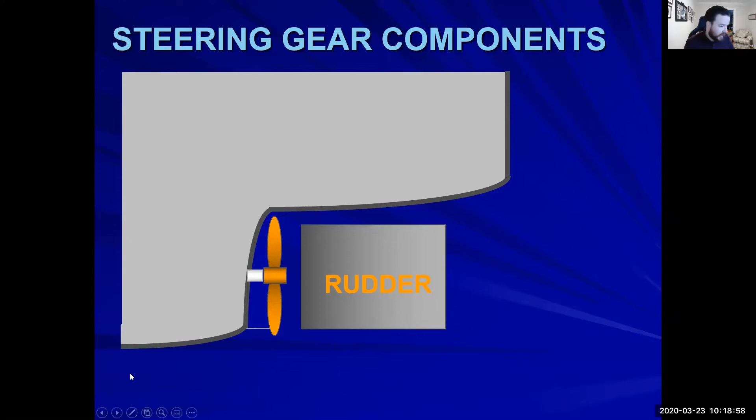Switch some windows around. It'll be better. This will be better for you guys. All right. So

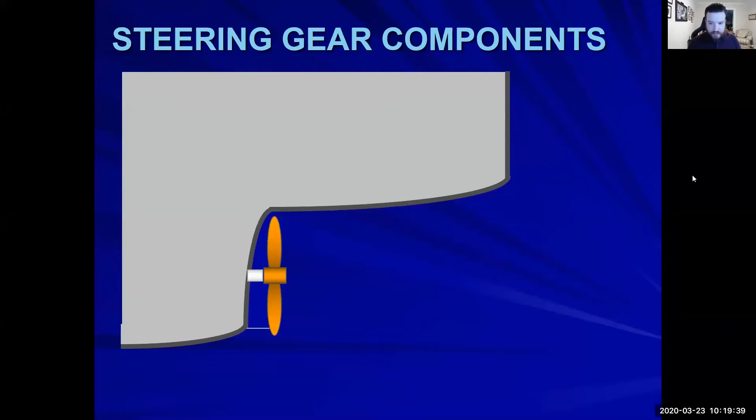Obviously we have our rudder. We have our rudder stock, tiller, steering gear, pumps, 6-way valve, and rams. So we know that the difference between the rams and our 6-way valve is the 6-way valve is controlling which steering gear pump is online. All right, that's all it does. It's not actually controlling which way the rudder turns. It's not controlling which ram is getting the feed of the hydraulics from the steering gear. It's controlling which steering gear pump is online.

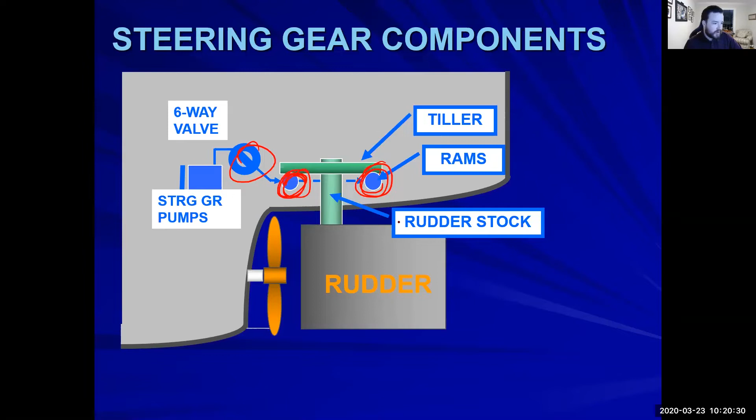The rams themselves control which way the rudder is going to be turning. Okay. Now, when we go and we're moving the rudder, we have what's called a Rapson slide. The Rapson slide is what's going to be controlling, and it's the tilting motion that's going to be either moving these rudders one way or the other.

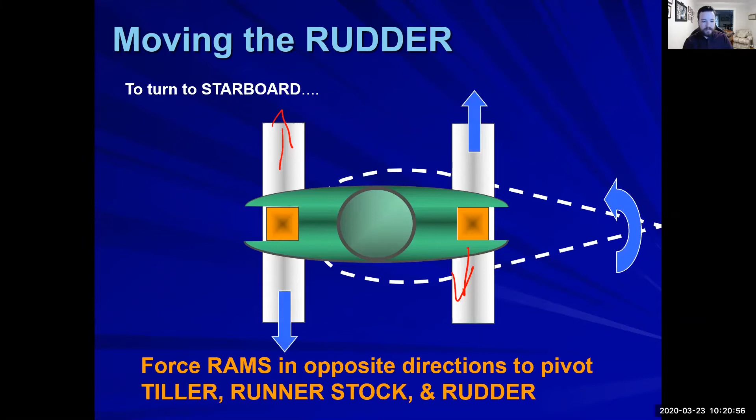Let's see if I can. Oh, there's the chat. Okay, good.

So these are the Rapson slide. All right. It is not the ram that's going to be controlling the tilt plate. This is the Rapson slide. It's going to be controlling which way the rudder is going to be moving, utilizing the rams. All right.

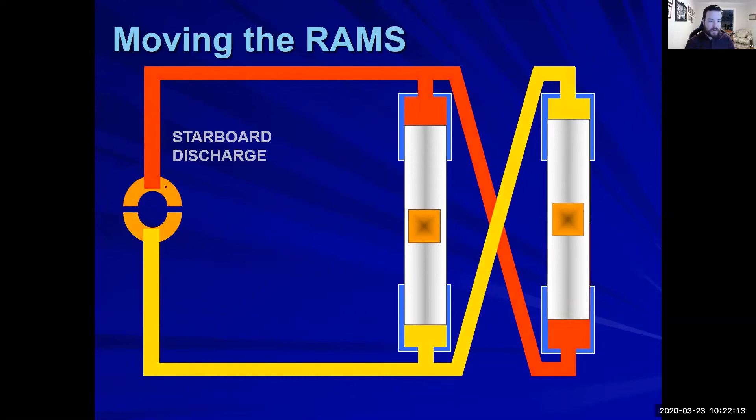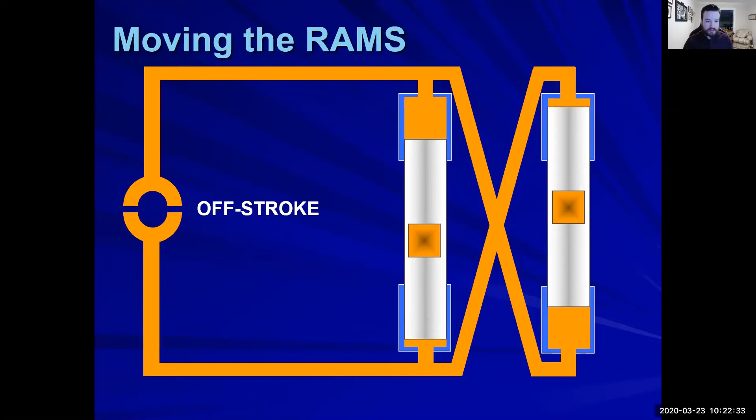So just to move the rams, we're going to be utilizing basically our hydraulic pumps. All right. So they're going to be crossing over, and they're either going to suck from one side and pump to the other, and then they're hydraulically locked. The rams are going to be locked hydraulically because the tilt plate is going to be flat. So it's going to be spinning, but still having zero pumping moving through it. Same thing on a port discharge. It's going to go the opposite direction, and then the rams lock in the new position.

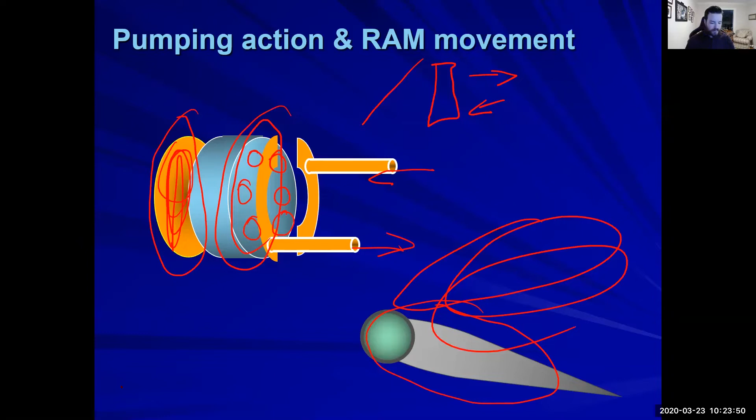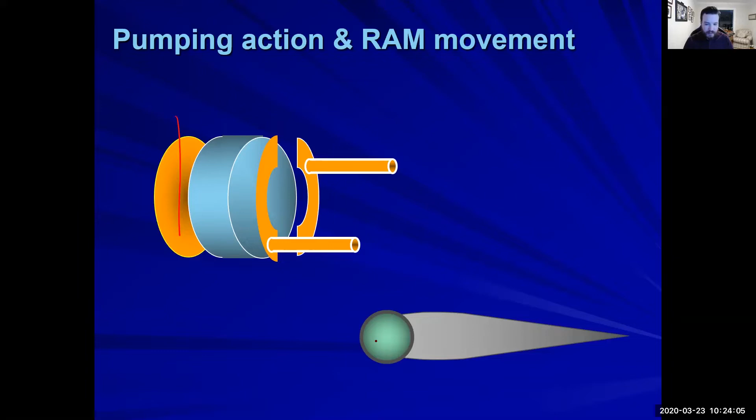As soon as you have an angle on your tilt plate, you're going to have movement going in or out one way or the other. All right. Just like that. And now you're in the position you want to be in, and your tilt plate goes back to the zero position, and you have no movement on your rudder down here. This is staying stagnant.

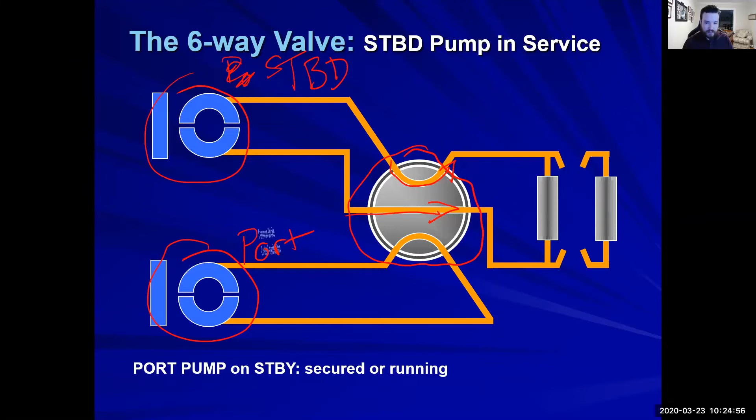But we're having no movement because of our common stroke, where basically our tilt plates are in a neutral position. But as soon as we have any sort of tilt, and just like we said last class, these are both controlled by the yoke and the differential, which is therefore controlled by the ram. Both of them are going to be moving together, even though hydraulic oil is only being sent from one side. So the starboard pump is the only one sending hydraulic oil to our rams.

And we go in the opposite direction, and now we have flow going the opposite way, even though our steering gear pump is still spinning in only one direction. All right, now we go back to our neutral.

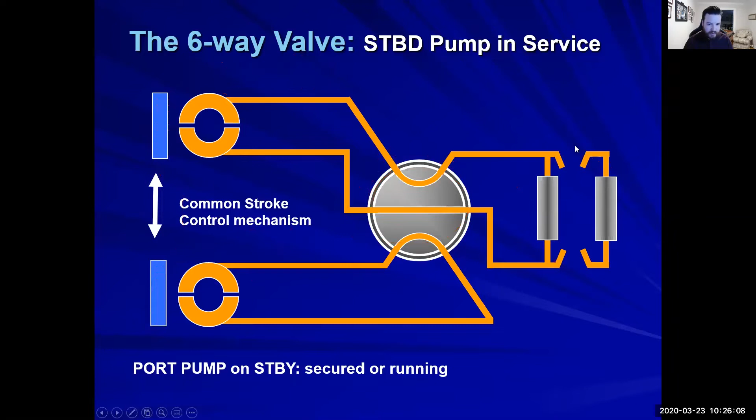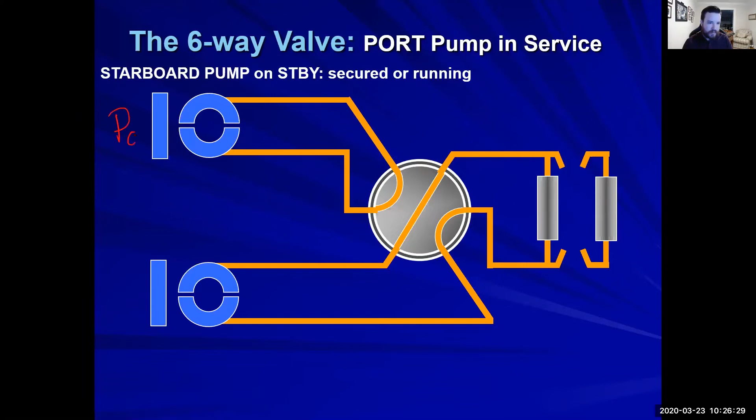And now we're going to have our 6-way valve spin. All right, and this allows us, again, to control which steering gear pump is online and which one is not. So we have our port pump, and we have our starboard. Our starboard pump is online right now.

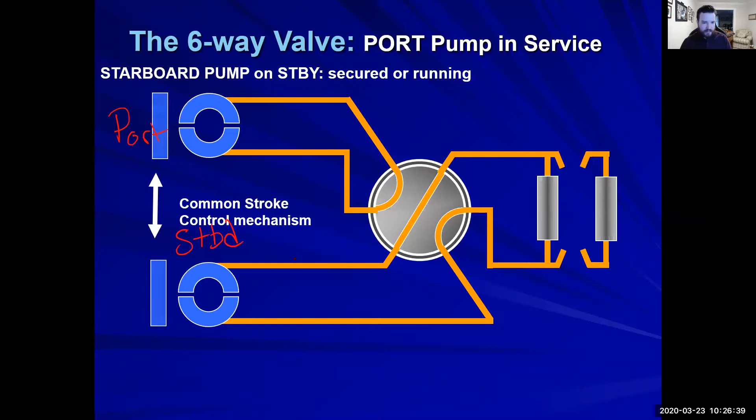Same thing again. If the tilt plate is moving one direction or the other, you're going to have flow going from only the starboard pump to our rams, whereas our port pump is just basically circulating. Again, this is how the rams are going to be going in different directions.

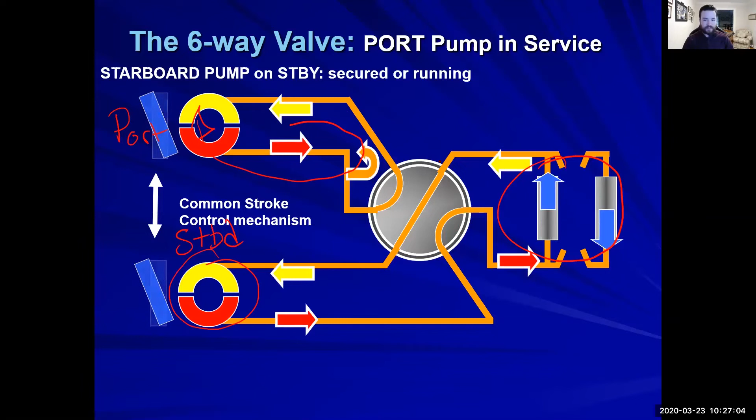So it has 3 positions, okay? Always 3. One is for the starboard pump online, the port pump is on standby. Like we talked about in class, the port pump could be running, it could be not running in any one of those conditions. All we know right now is that it's on standby. It allows it to run, but we don't need it to be running.

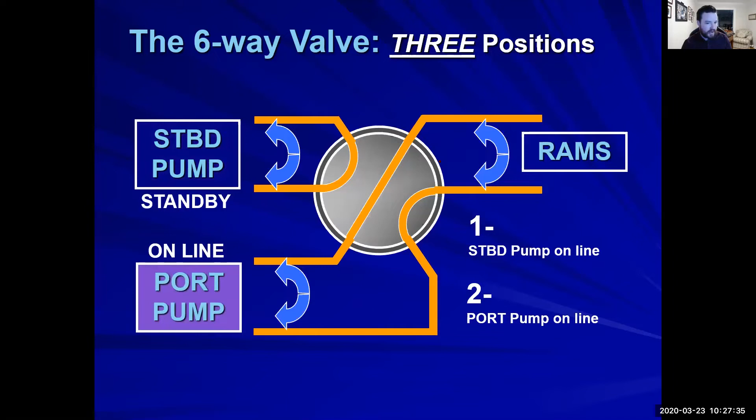All right. Position number 2 is the port pump is running, the starboard pump is on standby. And position 3 is a locked rudder position. All right. Like we talked about, this might be when we are in dry dock and we're trying to remove a portion of the shaft or anything like that. We want to make sure the rudder is going to be locked hydraulically.

Or we can be in a position where we're going to be dead sticking down the Hudson and we're going to be getting towed to the scrapyard because our ship is old and we don't want to have any ability for the ship to start steering itself.

All right. So why is it a 6-way valve if there's only 3 positions? It's because basically you have your 6 pieces coming off of it. So it's going 6 different directions of flow. That's why. Not based on the 3 ways that it could be in a position. It's where all the hydraulic oil is going to be going.

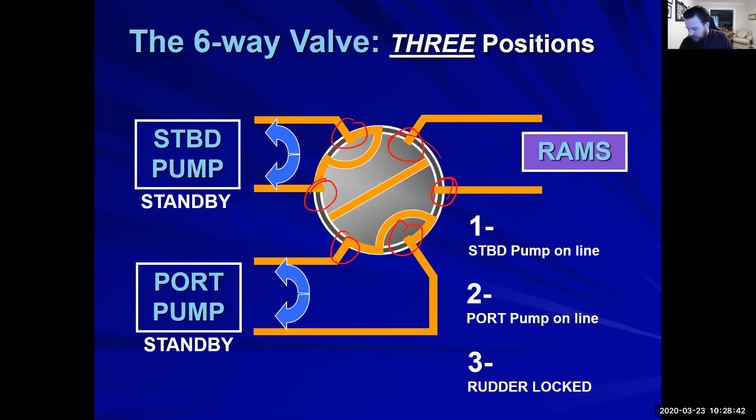All right. So negative feedback loop. All right. This, as far as what we're concerned with here, is just like we talked about. If you need to have 10 apples for some recipe that you're going to be cooking that day, when you're in the store, you basically are going to be grabbing one at a time. And every single time you get one, your mind is going to be computing, okay, I grabbed 1, now I need 9. I grabbed another one, I need 8.

That's the mentality. You're not just sitting there when you're grabbing apples going, I need 10, I need 10, I need 10, I need 10. And all of a sudden you have 20 apples in your cart. Every single time you grab one, you know you need 1 less than you did before. And that is what's going to be going in. Your feedback is how much you have. And this is what you want.

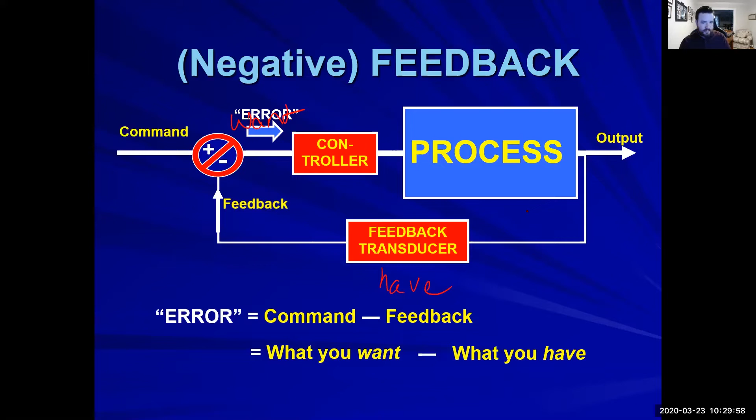All right, let's talk about the differential. Is everybody understanding? If you don't understand the negative feedback loop, let's talk about it before we get into the differential. Yeah, go back, please. You need to go back? Yeah, can we go back to the loop? Yes.

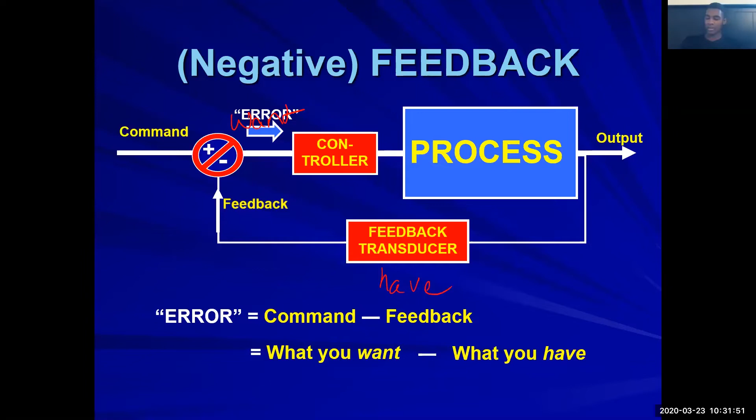All right. So with the differential, we have our input gear. All right. We have input gear number 1. This input is coming from the rack. All right. And the rack is coming from the helm. Then input gear number 2. This is coming from the rudder itself.

You're muted. Yeah, you're muted. All right, thank you. I must have hit the mute button by accident.

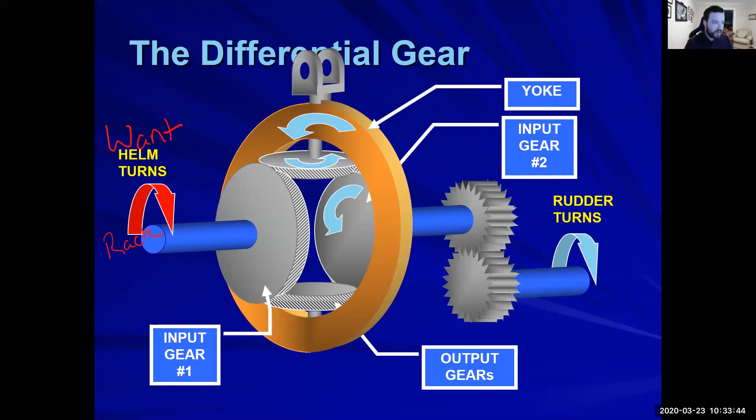So as this rack turns, you're going to be having an input gear number 1, which is what you want. That is your 10 apples that are going in. What you have is coming from the rudder. All right. This is your want, and this is your have. And this is your output.

This piece right here of your yoke. This is what is in your cart. All right. This is how many apples you have at that moment that you're still trying to get.

All right. So as the input gear turns, as these gears are turning, both this output gear and this output gear, they are connected and they're pushed into their gears. Where this hand is the output gear, this hand is going to be the input gear. And as it spins, it's forcing my other hand to do only one thing, which is to push, and it's going to turn it towards me. All right. That's what's going to be happening with it. And in turn, this yoke is going to be moving one way or the other.

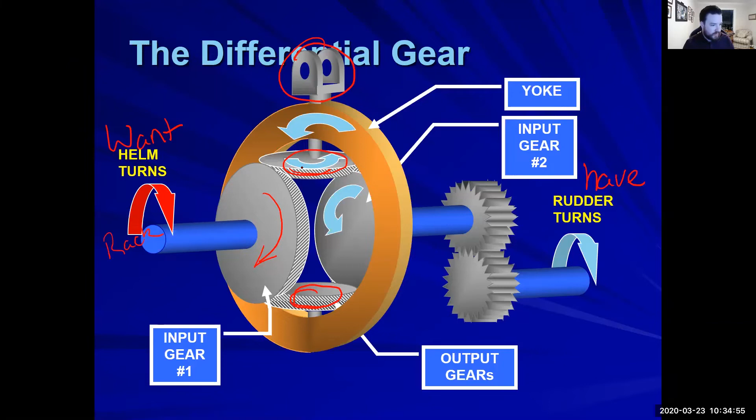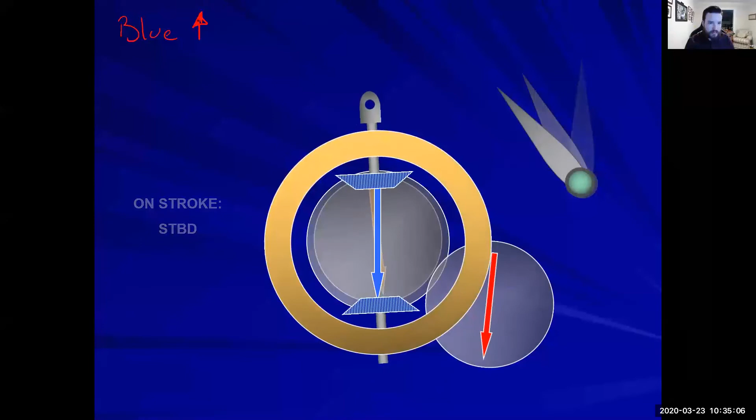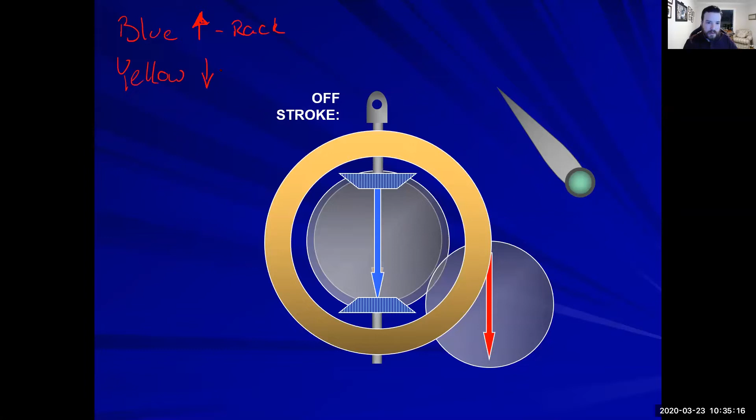So our blue line, our blue arrow, that's coming from our rack. Our yellow, that is going to be the input coming in from this red arrow. All right. This gear here and this gear is coming from the rudder. All right.

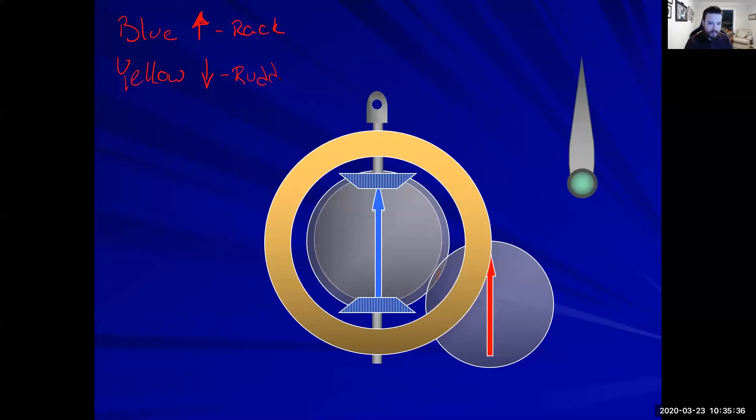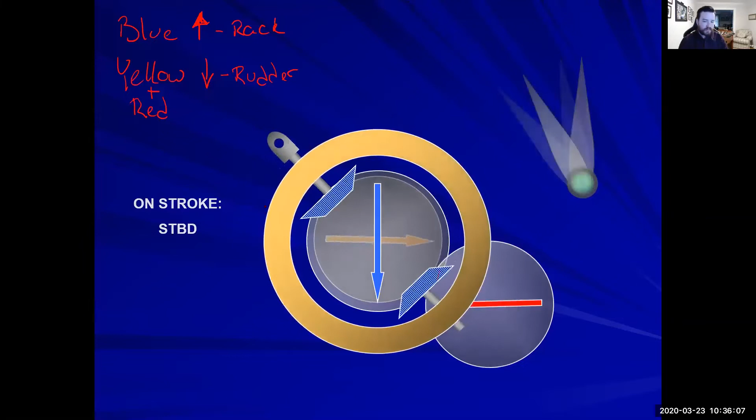So as our input is going in, it's the blue arrow. It's inputting a signal. That signal is saying, hey, tilt plate, I need movement in one way or the other. So as this yoke spins, this is physically moving the tilt plate right now. And as soon as the tilt plate starts to move, even just an inch, it may not be fully moved yet, but it starts to move.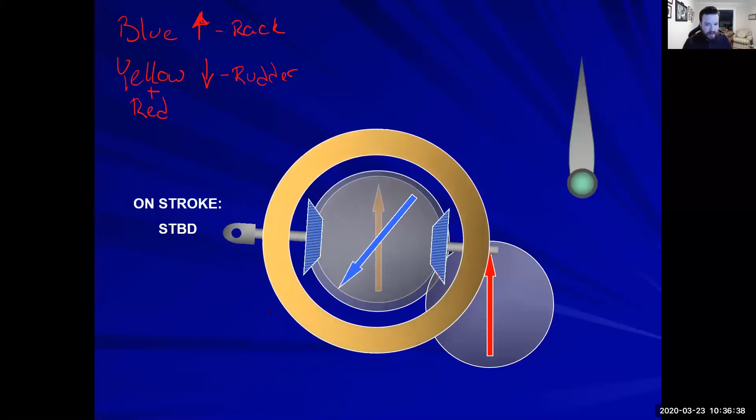You start to send hydraulic fluid through. All right. So you don't even have to get that yoke all the way tilted over. You will start to have hydraulic fluid moving through it and being pumped. All right. So we are pumping, pumping, pumping. And now since we started pumping, we are getting movement back. Our actual rudder is moving. And since the rudder is moving, we are now coming to our position that we want to be at.

And now that we're at the position that we want to be at, we no longer need hydraulic fluid moving, and we don't want to have to hold our actual helm in. If we want to go 10 degrees right rudder, we don't want to have to hold it at 10 degrees or go back to center the entire time.

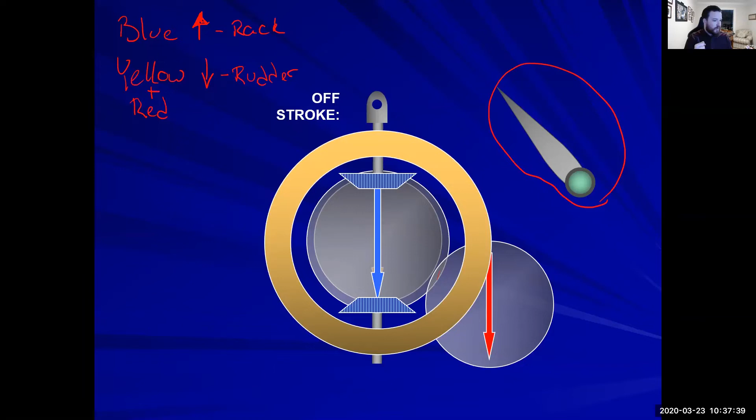Just like we were saying in class, if you had to make a right turn in your vehicle, you don't turn your wheel all the way over and then, okay, now it's set, now in order to hold it at that position, I have to go back to 0 position with my steering wheel. All right. It's the same thing on a helm on a ship. You've got to hold 10-degree right rudder. You don't want to be holding it. And when you're holding it, you don't have to go back to 0 to hold that position.

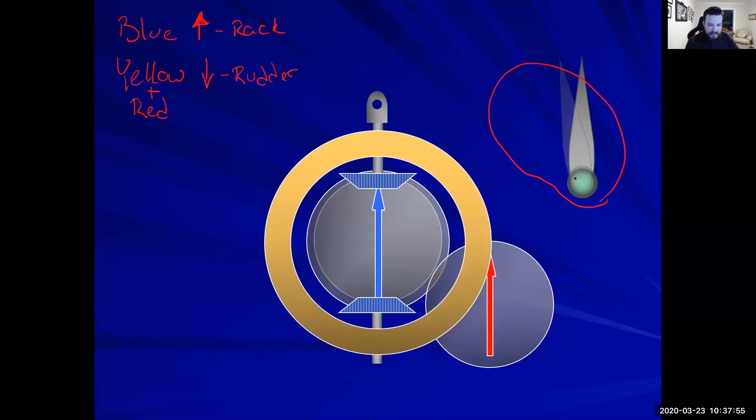So now we're getting an on stroke to port. So we are having flow going through. The rudder comes back to center. And we're good. All right. Keep in mind, every single time this comes back and the rudder comes either back to center or the tilt plate is in the neutral position, we're having no flow with the tilt plate, and when the rudder comes back to 0, it's in reference to the rudder being on the 0 position.

All right. So if the rudder is on the center line, that center line on the ship will be 0. All right. And then every line off of it, we have either 10 degrees going off, then we have 20 degrees, 30 degrees, and so on and so forth. Oops. All right. And when we talk about the actual tilt plate, this is going to be the neutral position.

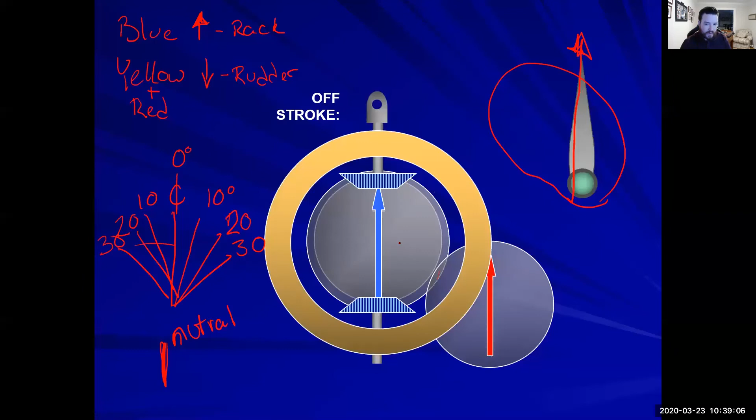So with the differential gears, anybody still confused in how it's working? Everybody kind of brought up to speed on it, a better understanding than last week or 2 weeks ago as far as what we were remembering?

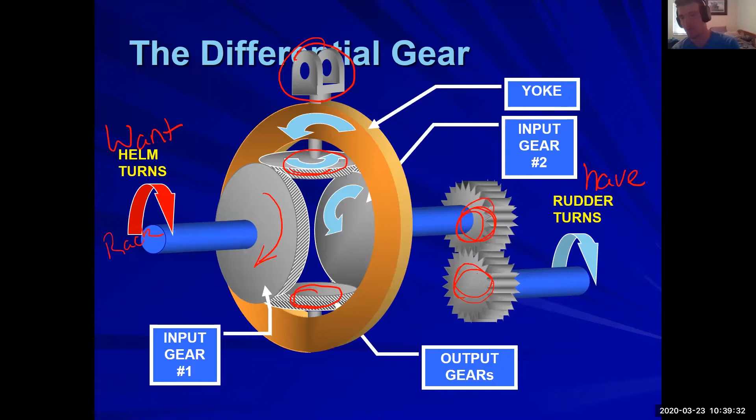Wait, so is that first turn, it's angling the tilt plate is what you're saying? So the blue arrow, whatever the blue arrow. Yes. Yeah. So this is coming in from the rack position. Okay. All right. And the yoke itself, this piece right here, this is what everyone talks about as far as the spider legs. You actually have like a piece of bolt coming off of here and it goes off and it goes to a tilt plate. Oh, okay. All right. So that's moving that.

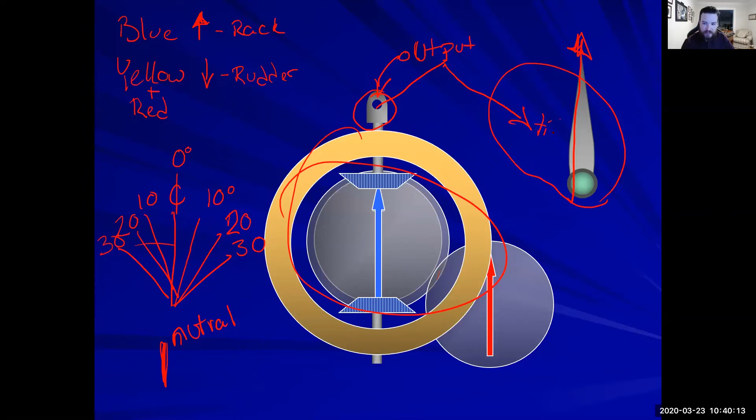This is giving input. This is the output. This is the output of this system here, but it's the input to the tilt plate. So right. This is what's sending a signal out to the tilt plate. Okay. All right. Yep. Anybody else? Okay, cool.

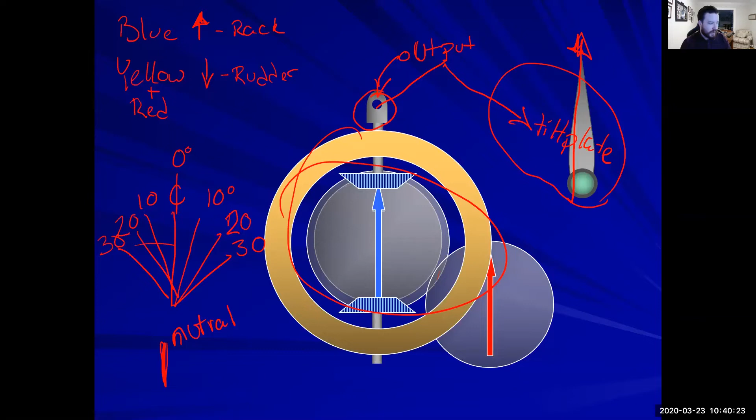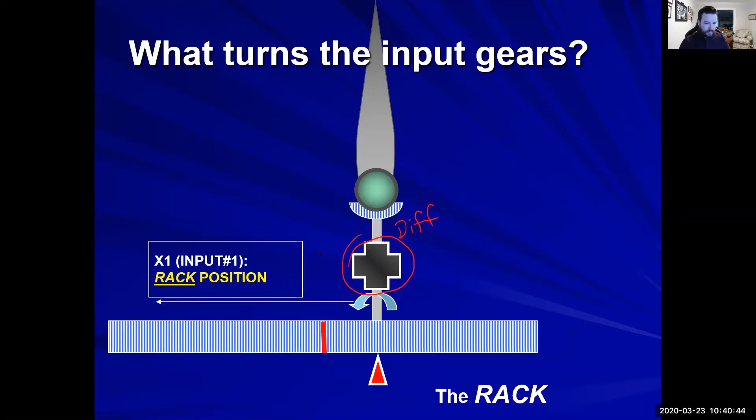So what turns the input gears? So we have the rack. Now right here, that's going to represent our differential. Now, this right here and this rack is basically like a gear on its side. Like you take a gear and you're going to split it open. So all along this whole rack is going to look just like a whole bunch of teeth.

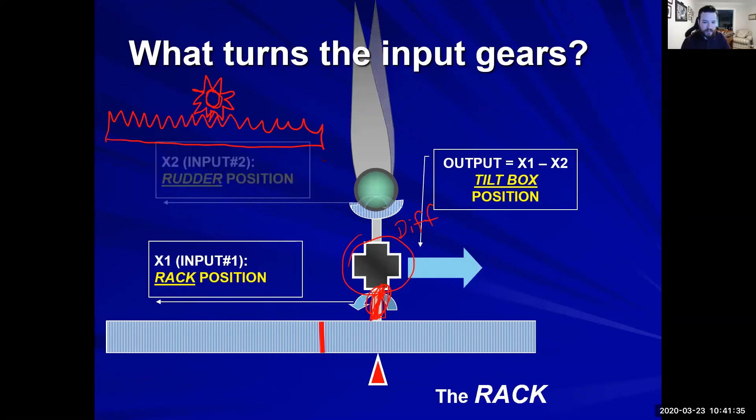So that is your input. Input number one, that's coming from the helm. That's coming from the rack. Input number two, that's coming in from the rudder position. All right, what you have at that moment. And the output is going to the tilt plate or the tilt box.

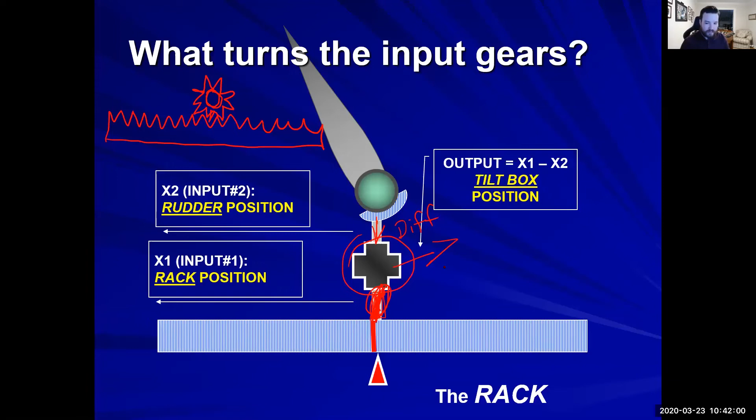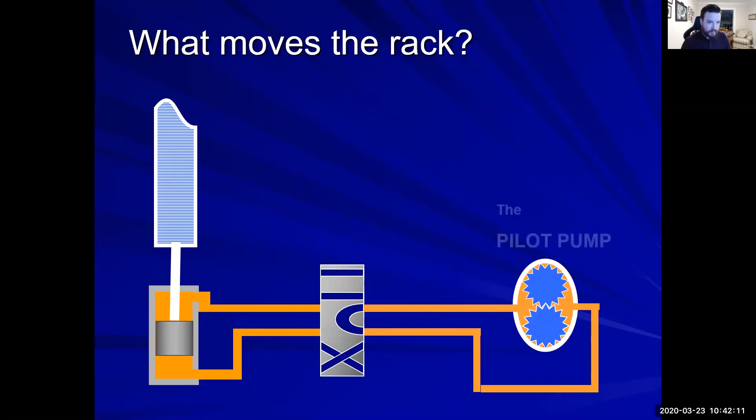So what moves the rack? You have the pilot pump. All right. Now, just like our steering gear pumps themselves, this is always going to be spinning. This is always going to be pumping. All right. But this shuttle valve right here has three positions. One of them is just going to keep looping fluid back around. The others are going to give the other two variants that you have, either crossing flow or going in the direct flow pattern.

So right now we're having flow and it's just going through the pilot pump and that's all where it's going. All right. Now, as soon as we go to this position, now we're having flow that's going in to the top part of the rack. All right. Whereas this is a piston and the entire time you would have a signal that comes in from the helm and it's going to push either one side or the other of the shuttle valve and you're going to have flow that goes through it. And at the same time, it's going to be sucking it out from the bottom.

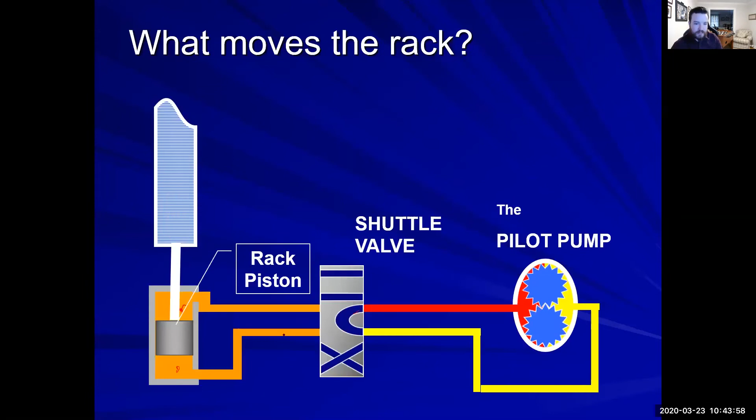What would you say is gonna push the shuttle valve? We're going to get into the next slide, but it's going to be basically some sort of electrical signal coming from the helm. All right, the helm is going to be directly controlling the shuttle valve. So as we go in the other position, you can see we have flow that's going to be going across here. And it pushes on this side of the piston and sucks from this side. All right. So that's how we have control over our rack.

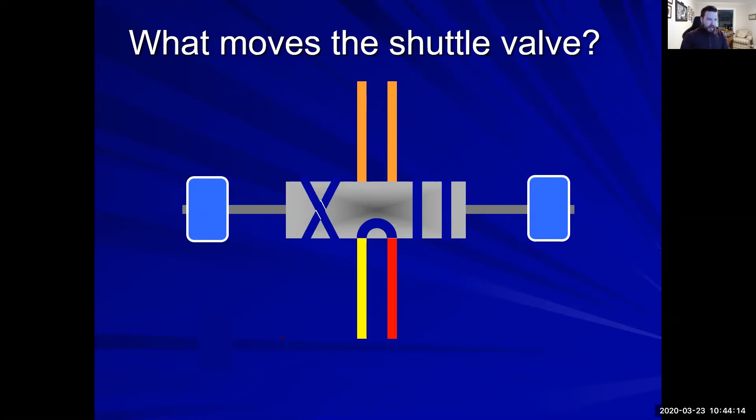So now we have the shuttle valve. We have solenoids. So just like we talked about in class, with solenoids it's basically coiled wire with electricity. All right. And basically what you're doing is when they're energized, they're either going to be pulling in the solenoid valve or it's going to be pushing out the solenoid valve.

All right. So right here, what we have is a solenoid that's energized and it's pulled in the magnet here, which means that this is going to be a normally closed solenoid valve. All right. So when it's de-energized, it's going to fail closed. All right. On either side of here. That's when you're going to hear reference to normally open or normally closed. All right. Normally open would mean that as soon as it's de-energized, it's going to fail open. All right. And it depends on which systems that's going to be the safer side.

All right. So just like when we talked about with water making, we would want something to fail open when it's going to fail to the bilge, all right? Because we wouldn't want to throw salt water into our distillate tanks. But you would want something to fail closed is the valve that's going to our distillate tanks. So if you lose electricity to the ship and you have flow coming out of your distillate tank, you're going to have no flow going to your distillate.

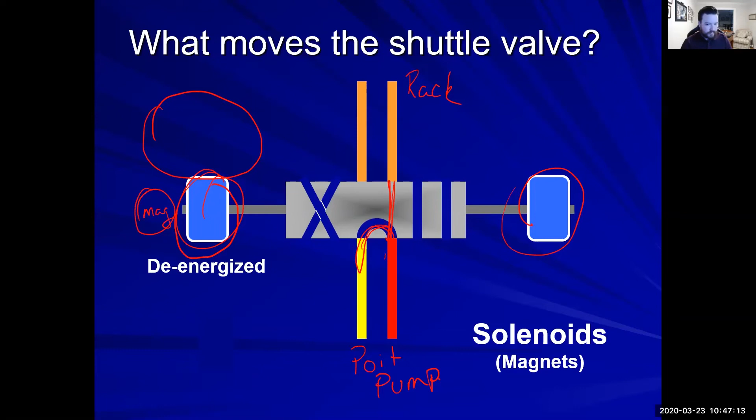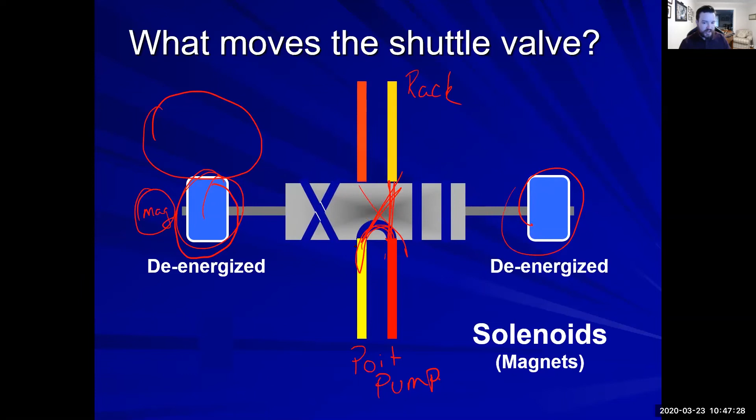So when this solenoid energizes, it's going to pull in, and now we have a cross-flow position. And it de-energizes, and you're just having flow going through the pilot pump.

Any questions so far? All right.

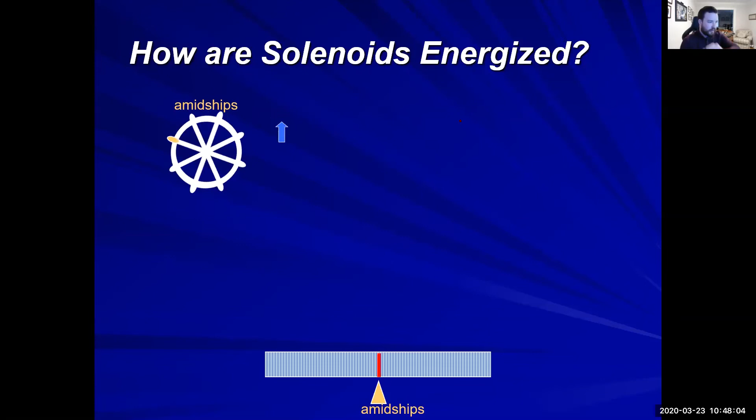So when you have your helm, you either have positive voltage or negative voltage, depending on which way it's turning. So when you turn to port, you're going to get a positive voltage. The more you turn to port, the larger the voltage. So when you go to starboard, you now have a negative voltage, and the same thing again - the more you turn, the more negative the voltage.

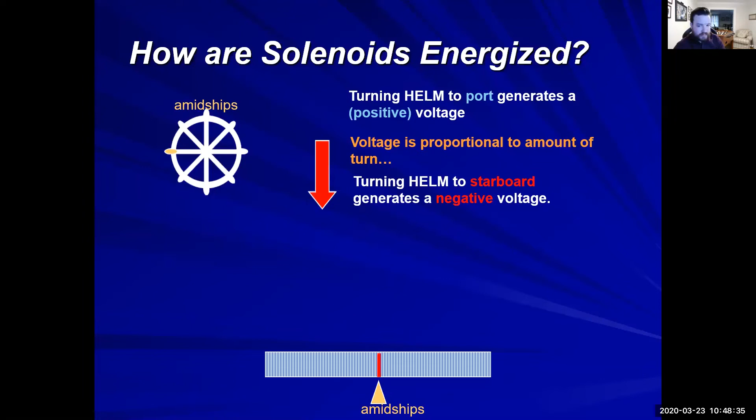So moving the rack to port generates a positive voltage. The larger the voltage, the more rack movement you're going to have one way or the other.

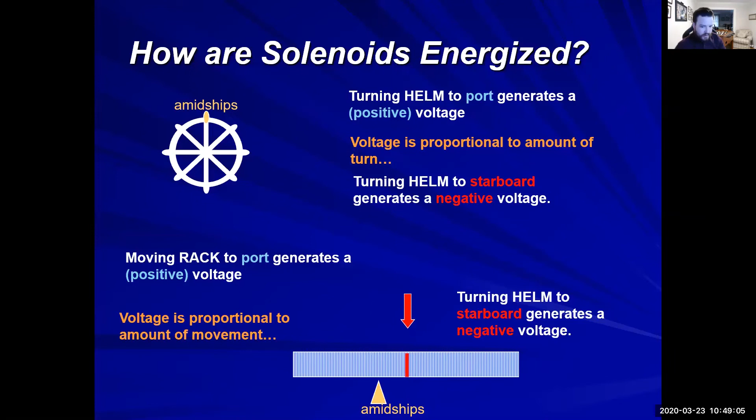Again, we'll re-hit this when we hit electricity. This piece is not important until we go into electricity.

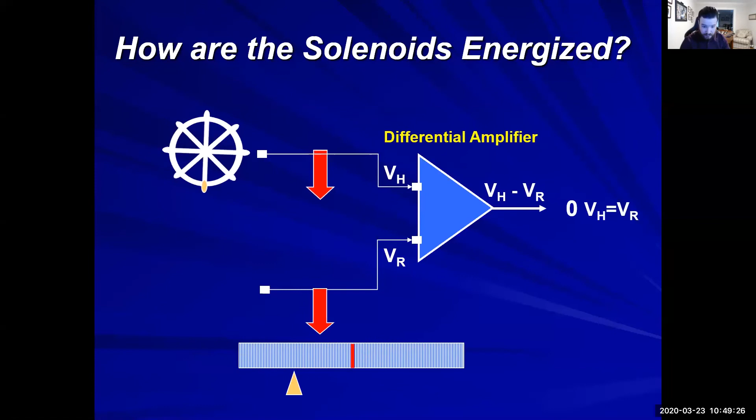So basically what we have is the helm position and the rack position - helm to port of the rack. As soon as your helm position is different from the rack position, with the helm more towards the port side of the rack, you're going to have a pull that allows it to pull the rack more towards the port side, to get a stronger pull.

And then the same thing for the opposite direction. If the helm is farther starboard relative to the rack, you're going to have a greater negative pull, so the rack is going to increase even more towards one direction.

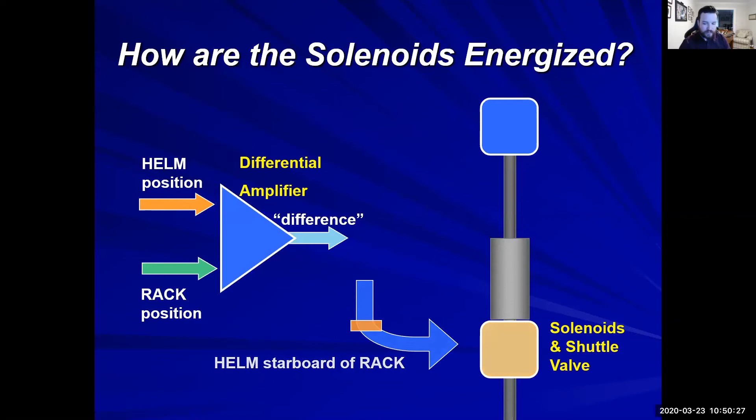So as we go through the steering sequence: the steering gear pump, both of them are running off stroke, so the tilt plate is in a neutral position. The pilot pump is recirculating, so it's constantly flowing.

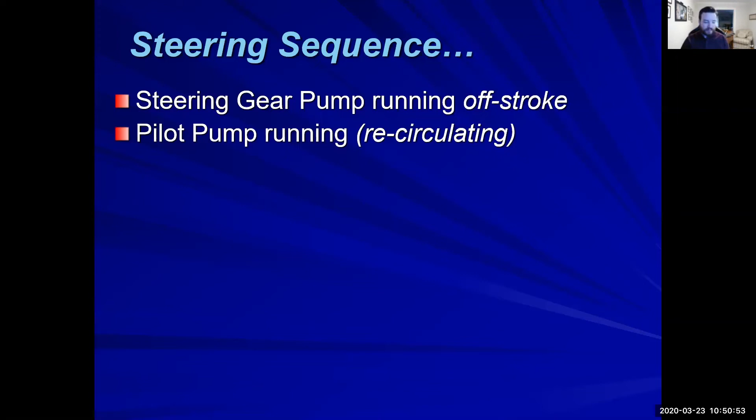The helm rotates for right rudder - so this is just the helm moving. The starboard solenoid energizes, and the shuttle valve directs pilot pump discharge to the rack piston.

So now we are starting to actually have movement. The solenoid is energized. We now have flow coming out of the pilot pump and going into the rack piston that's going to move the rack. So the rack moves to starboard.

So turning differential gear number 1 - remember, this is the input coming off of the rack itself. So the rack movement has matched the helm movement, because how much you turn that helm one way or the other is going to determine how much that rack actually moves.

That's the big thing - it de-energizes. The rack movement matches the helm position. So once it matches, it de-energizes the solenoid, returning the shuttle valve to the neutral position.

So the rack still - if that arrow right there is the neutral position.

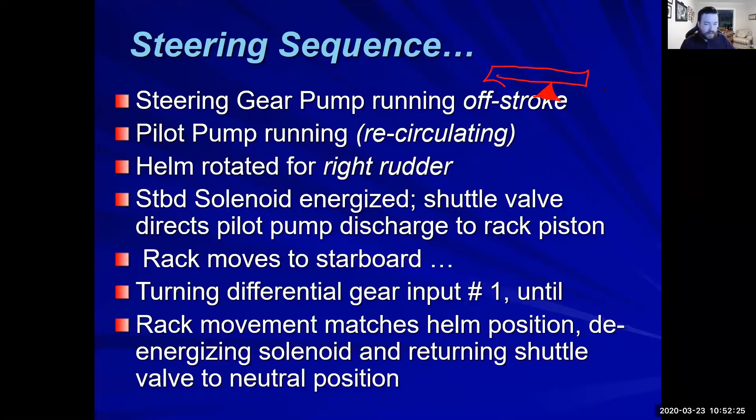Just like the rudder, just because we have met what we want to get to doesn't mean that we have to bring the rack back over to neutral. Just because we've reached the point we want doesn't mean we come back to our neutral position. Just like when you're steering a car - making your right turn doesn't mean you have to bring your steering wheel back to neutral in order to hold that right turn.

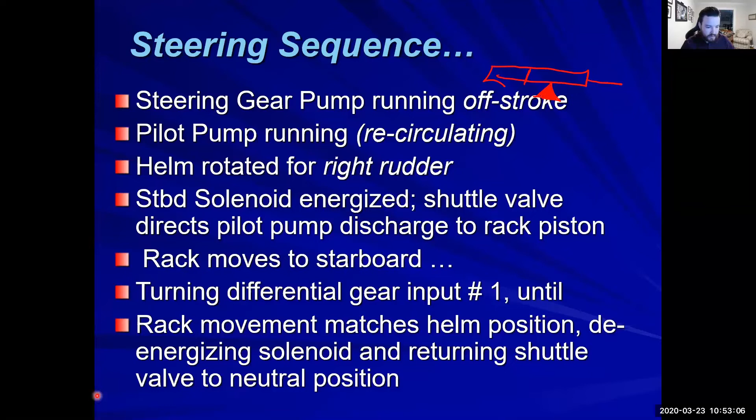All right, so this is all of it going in one full sequence. Again, number 1 matches with number 1 right here, even though they're not numbered. So the steering gear pump is online, pilot pump online, both actually having flow. All right, the helm moves to starboard.

Our shuttle valve gets sucked into its solenoid because the larger increased voltage we have here is going to have an actual effect on our solenoid.

So now we have flow coming out of this side and going into this direction. Our rack moves, so our rack has moved to match the position of the helm. Now that it's matched the actual helm position, our shuttle valve has no differential and comes to a neutral position. Notice that even though it's in neutral position, we have not moved our rack position. Last but not least, the rack has given an input to the differential.

Any questions on the sequence so far before we move forward? This is the other half of the sequence we're going to get into in a second.

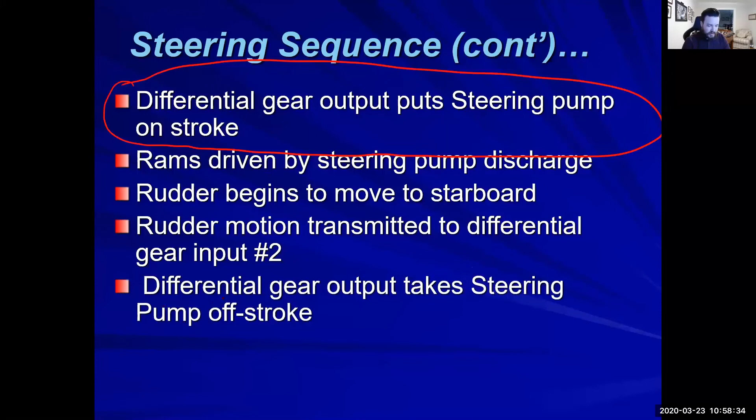The rams are driven by steering pump discharge. The rudder begins to move to starboard. The rudder motion is transmitted to the differential gear, input number 2. The differential gear output takes the steering pump off stroke. The rudder motion stops, and the next helm movement will restart the sequence.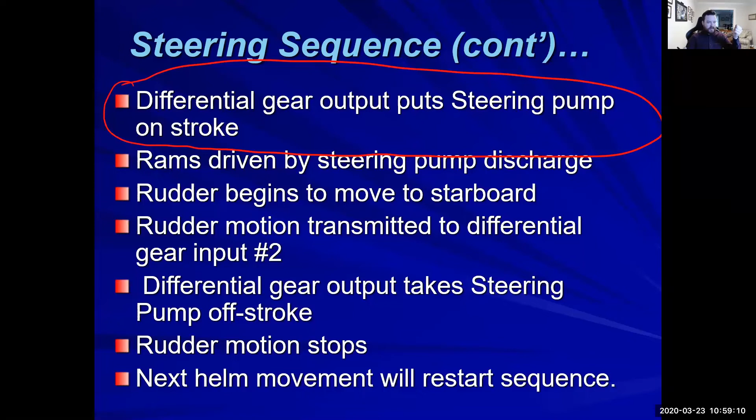And in the middle of this sequence, you can restart it basically. If 10 degrees isn't enough, just like we talked about, you can go to 15, and this will just continue the sequence even more. But just keep in mind that when you move to 5 and then to 10, as soon as you start having rudder movement, this is going to be happening continuously.

So remember what spot we were up at the last time with the drawing. We've only given input to the differential. The differential has moved the yoke. The yoke is moving our tilt plate right here. This is our tilt plate. Our tilt plate moves, and now we have flow.

Now as the rams move, the Rapson slide has actually repositioned, and has repositioned our rudder has officially moved to the position we want it to be in.

Keep in mind, in this entire sequence, this helm is still at 10 degrees right rudder. No one has moved it back to neutral, no one has done anything else with it. So we are officially at 10 degrees. The 10-degree input is saying, hey differential, I'm at 10 degrees. You don't have to be moving me anymore. I don't want to move anymore.

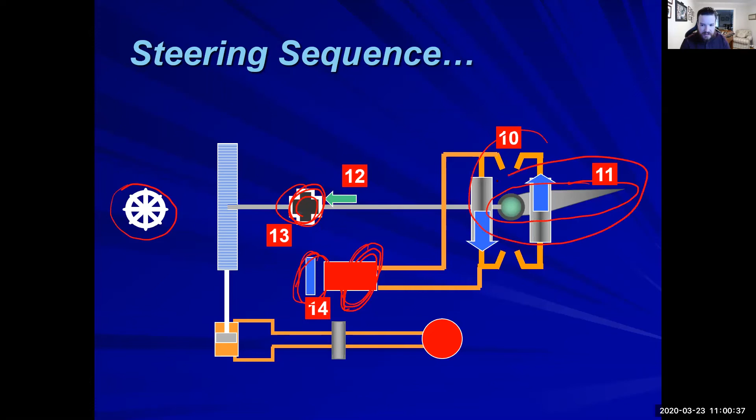The yoke comes back to the neutral position, and it causes the tilt plate to come back to neutral position. And now we are still having this pump right here. It's still spinning, but it's not outputting any hydraulic oil. So this rudder here is locked hydraulically. These rams will not move.

And again, if we want to do anything else, it just will restart the entire sequence.

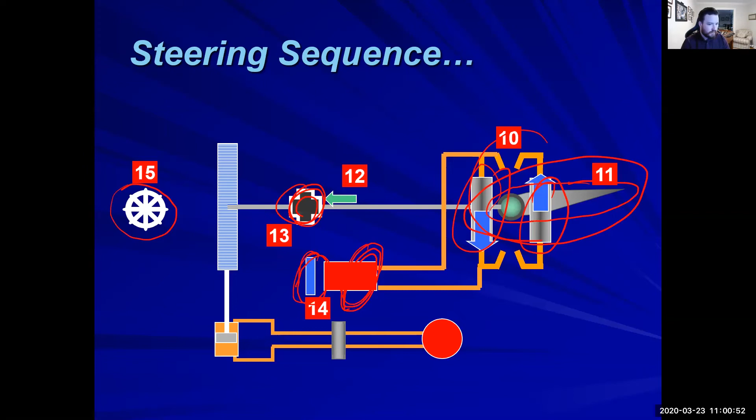So, any questions on steering gear? Anything that we've gone over? The shuttle valves are closed normally, right?

The shuttle valve has 3 positions. Or no, sorry, the solenoids rather. So those solenoids, it's all in reference to what is happening when there's no electricity going through it. So they are in the normally closed position.

Nice, so when no electricity is going through, which way is the magnet? Is the magnet going to be drawn in, or is the magnet going to be pushed away?

Any other questions? It's a nice little review for everybody. Everyone feel better about as far as what we're doing? Yeah, that was a lot better. You understand it a lot better. Good.

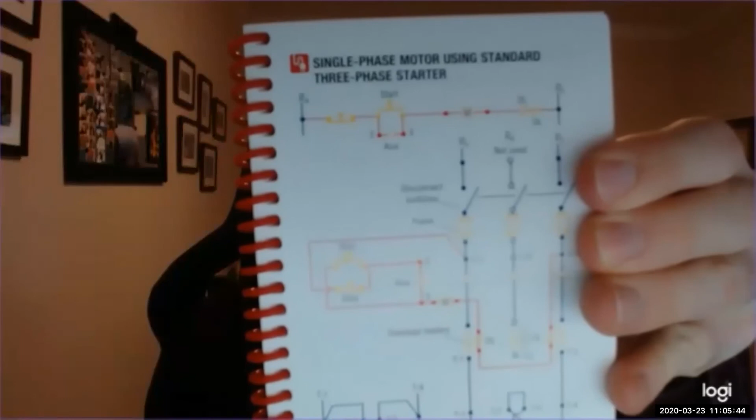Where is it? Okay, so here's the good thing. Like most electrical books that we have in the industry, this is actually geared towards operators, which is what we're trying to be. So here's a basic motor controller circuit. We're going to get into the breakdown on that, but to find information on this in any good book is hard to.

So I would highly recommend getting these. Like I said, it was $12 off Amazon, and almost every single ship you go onto, someone will have some sort of a copy of these out there because they're that good. They're also quite small. I mean, this is my head compared to it. It's not a big textbook.

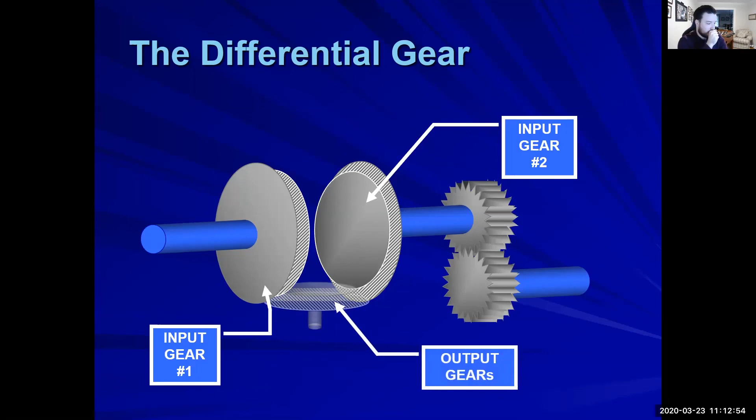We have both of our input gears. All right. Now they're both coming in and they're giving a signal. So input gear number 1 is what you want to have. Input gear number 2 is what you have at that moment. That's coming in from our rudder. Now our output gear is basically going to be spinning the yoke one way or the other. All right. Now let me swap.

All right. So your yoke is going to be going in one direction and it can go the other direction. So these output gears will spin because of these input gears. And like I said in class, if you put your hands like this and you try and move your input gear, your left hand, or your right hand if you're doing this, it's going to force your hand to spin.

And now since they're attached to the yoke, they can't just free spin on here. So they need to move, because each gear tooth is going to be putting a force on it. And that force is being applied, and it has to have movement. It has to escape somewhere. And that escape is going to be propelled by this yoke. It's going to be outputted that way. Does that explain it better, or is it still confusing?

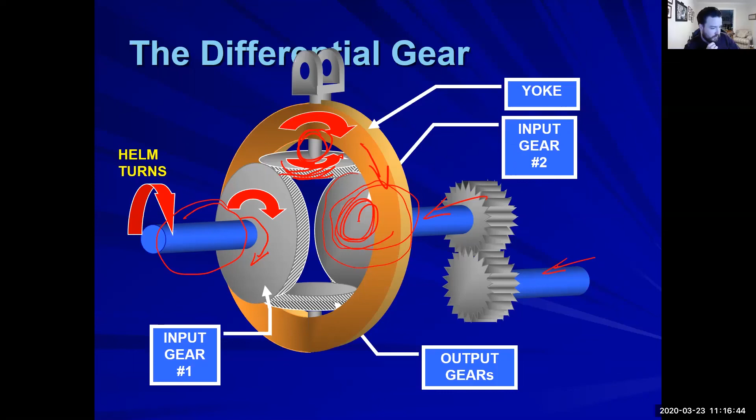All right? Better? Worse? Yeah, thank you. That's much better. Okay. Anything else about it? Nope. Okay.